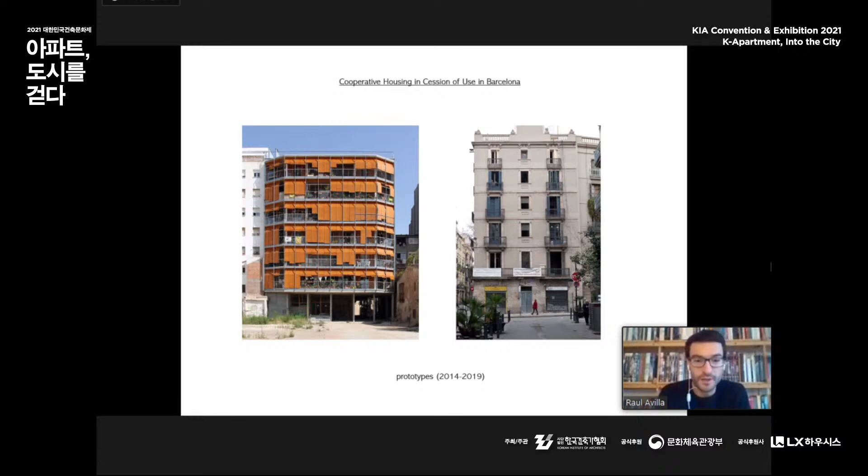So the history of cooperative housing in Barcelona has less than a decade. I'm going to go briefly through different case studies. The first two were prototypes that started in 2014, inhabited since less than two years ago. On the left-hand side, La Borda, a cooperative building on top of a public plot. On the right side, Carrer Princesa, a public building refurbished. It needs to be noted the importance of municipal support in fostering these co-housing and cooperative housing models, which, in my opinion, makes Barcelona a pioneer city in this context in Spain.

So Can Batlló, long story short, is part of an industrial settlement which had been claimed by grassroots as part of public facilities for many decades. Finally, in 2011, neighbors entered the premises and started self-organizing them with the permission of the administration, creating a number of working groups to address the public facilities, producing them in a self-managed way, claiming that since they were the ones producing and procuring them, they would be able to do better than the administration. One of them was the housing working group, which produced the example of La Borda that I was just mentioning.

In this case, dwellers decided to have less private space in their houses in order to foster shared spaces or collective spaces, given limited resources in both budget and space. This produced a number of spaces which are actually extensions of the house, making the dwellings bigger than they actually are.

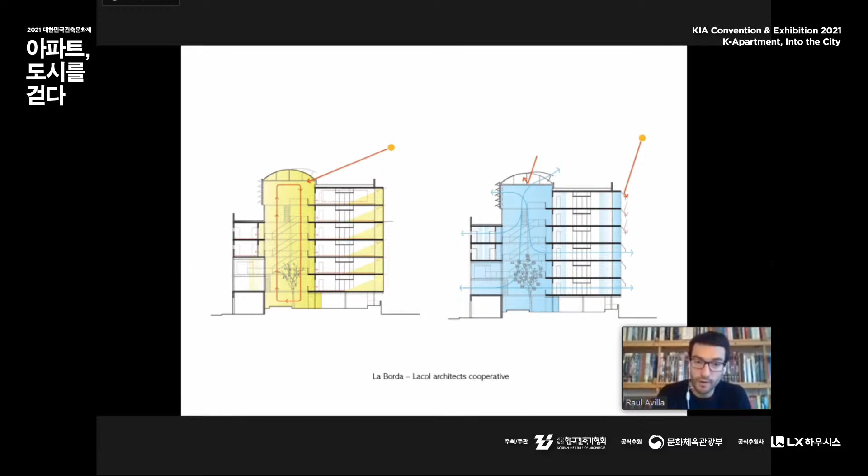This is allowed since both ownership and management is collective, and this significantly improves the energetic performance of the building for the benefit of dwellers. On the other hand, it produces a pedagogical effect in the way users understand the carbon footprint of their own living.

On the other hand, the typology in this case is defined by three different sizes. As opposed to what we were looking at before, where the household composition was predetermined, in this case that does not happen. There's freedom for users and households to interpret these dwellings, and dwellings are defined in relation to the household size and not the composition.

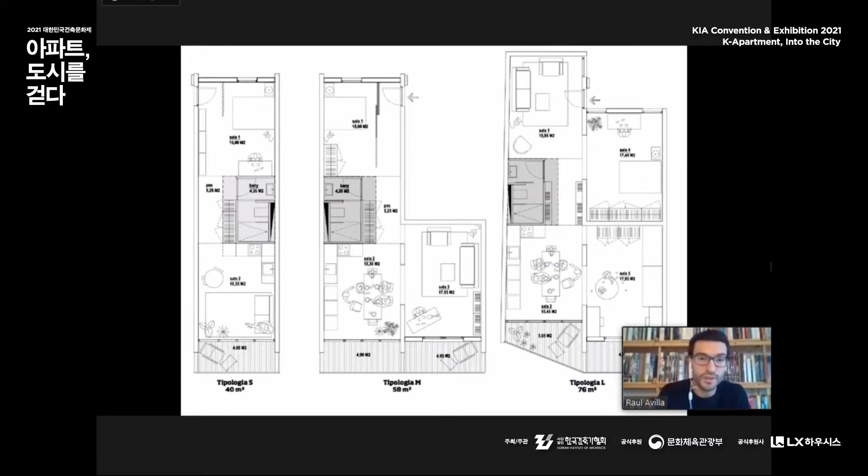In addition, there are some extra rooms that can shift from one dwelling to the other. So these houses are actually able to increase or decrease over time, allowing a higher degree of adaptability in the future. That's how the first floor plan looks like.

Dwellings are facing south, where the sun comes from, and then north is the place of public utilities and shared spaces. And if you can see this photograph, which is pretty much like a section of the building, we can see how these shared spaces are actually scattered throughout the building, allowing a higher degree of access for all dwellings.

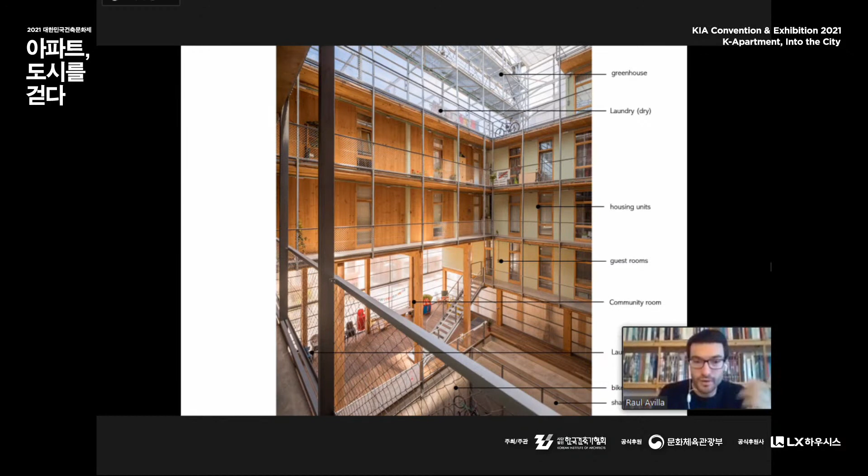So these are a couple of images of the building I took a few weeks ago, showing how the building looks like nowadays. You can see the appropriation of the shared spaces by dwellers, and this responds to a high confidence that they have among each other, and this feeling of community that allows the use of the shared space.

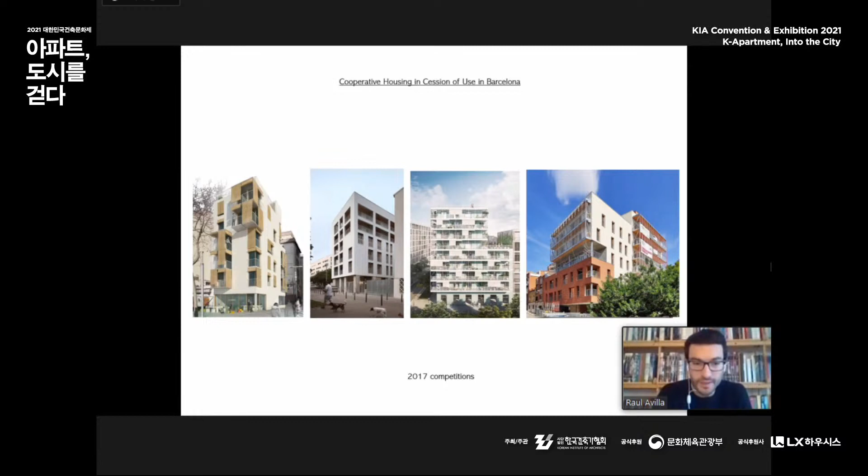So after 2014, there were two other competitions, in 2017 and 2020, by the municipality to foster the cooperative housing model. An example is La Palma, which is in the Poblenou neighborhood, and another example is Cirerers.

In this case, as you can see, both buildings, like La Borda, are built in wood, which is something new in Spain, and actually makes construction more expensive. So dwellers decided to build more expensively in order to have a lower impact in terms of carbon footprint. The building responds to dwellers' concerns, both politically and socially, in relation to the impact of building in our cities.

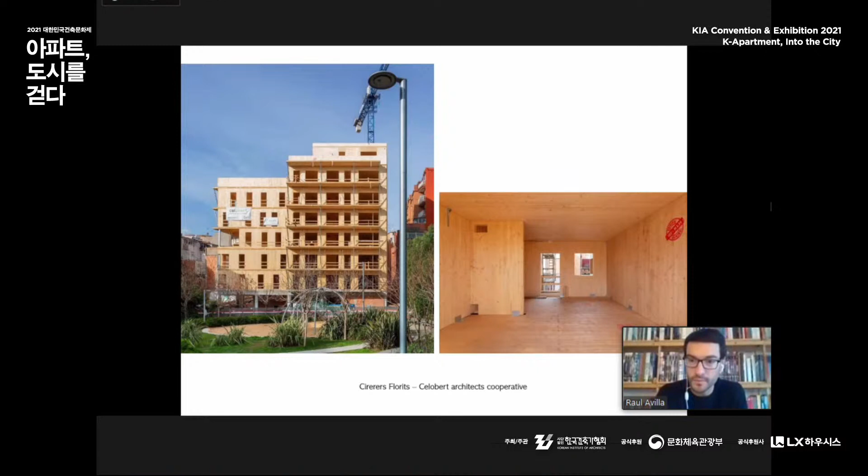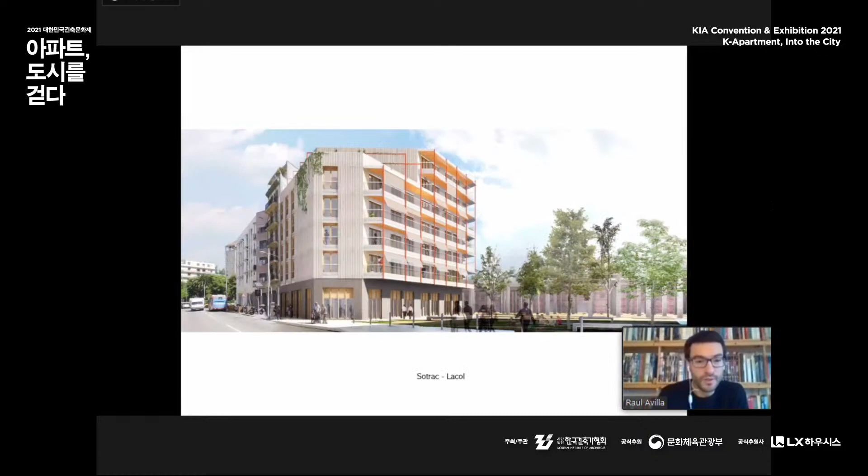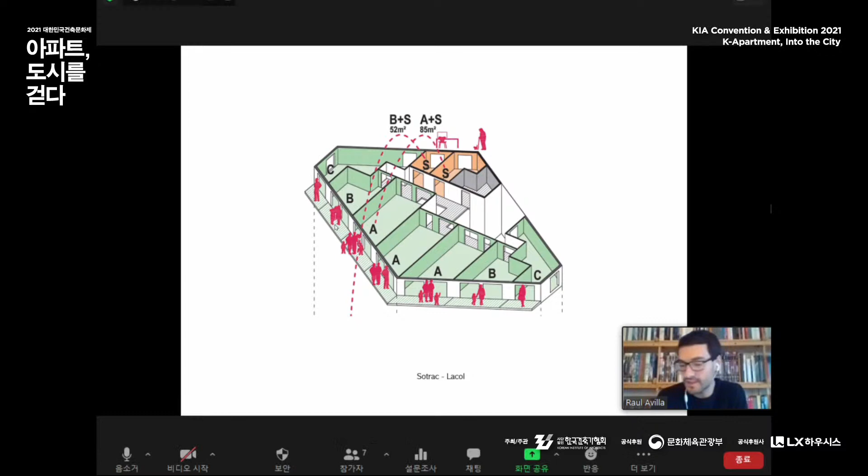Then the third competition took place in 2020, and in each of them there's a degree of experimentation. For example, the Sotrac building by Lacol, also in Can Batlló, is experimenting on one hand with satellite rooms, how two rooms can be an extension of all these apartments we can see here, or how the floor plan, so each floor, can be understood as a cluster living in which the entire floor would be kind of a house.

This is a model that has been tested successfully in some other countries, for example Switzerland, but we don't have precedents in Spain due to the legislative understanding of what is a home and who composes it.

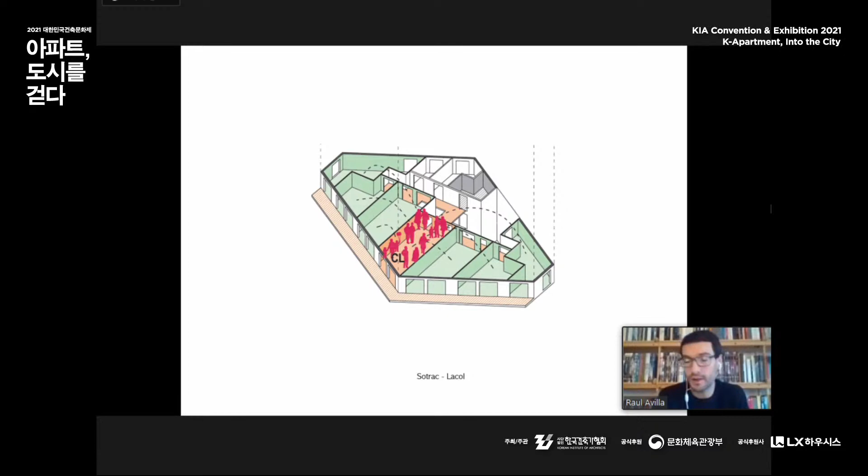So that's how the building will look like. Again, you can see the greenhouse on top, wooden construction, and fostering of...

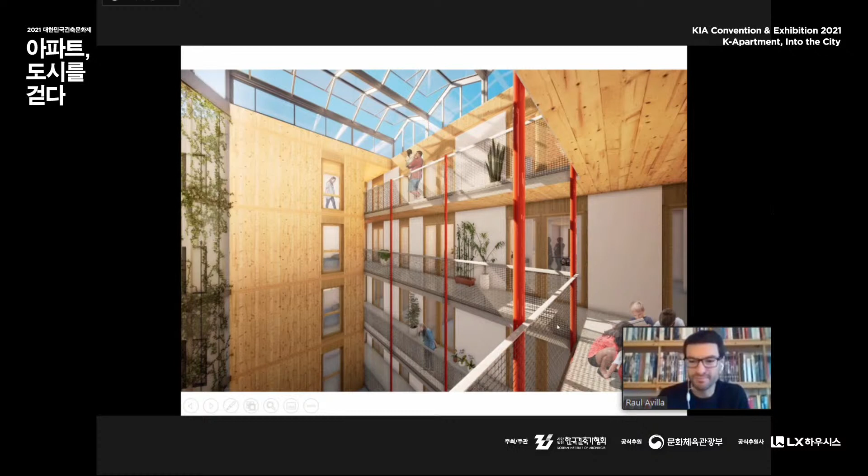The last example I will present is a building that I'm co-author of the design for, and it was awarded a first prize, as with the previous example.

In this case, as in the previous one, it's important to underscore the role of the active user and the awareness of what it means to live in co-housing with a community. We wanted to address the concern that we don't know how we will be living in the future in terms of household composition, so we designed a building that is neutral and operates as an infrastructure, taking as a starting point Habraken's theory of infill and support.

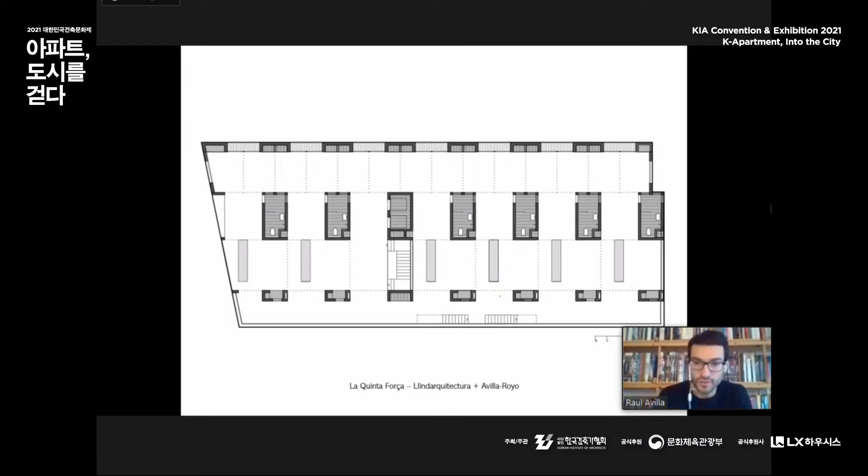So the building was delivered to the community as you can see now. They could decide the limits of the houses according to a predefined system agreed with them in the first meetings. The building aims to respond to different situations and futures: nuclear households, extended households to address problems like aging population and solitude, and to respond to multi-generational living.

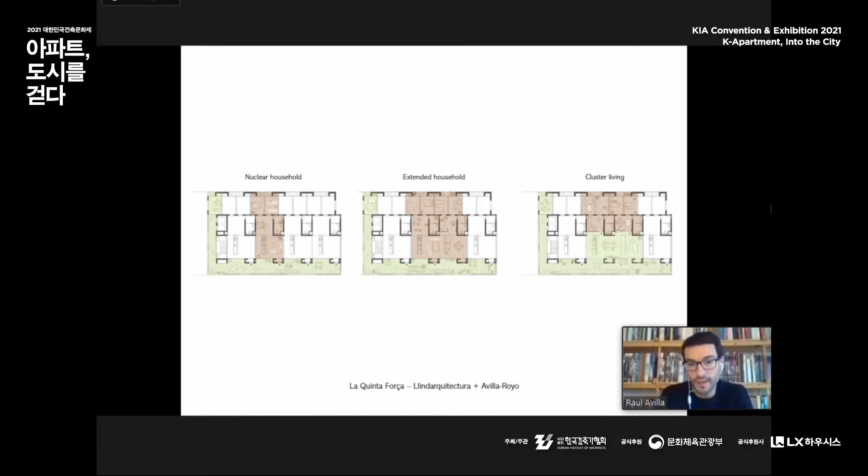And in the last example, cluster living. The idea is that the building can take all these different forms over time, not something decided only at the moment of first inhabitation. This is possible thanks to the collective property and collective self-management of the building.

That's one of the potential outcomes of the plan. We already envision rooms that can be used in many different ways, where certain shared spaces are generously appropriated by the dwelling houses.

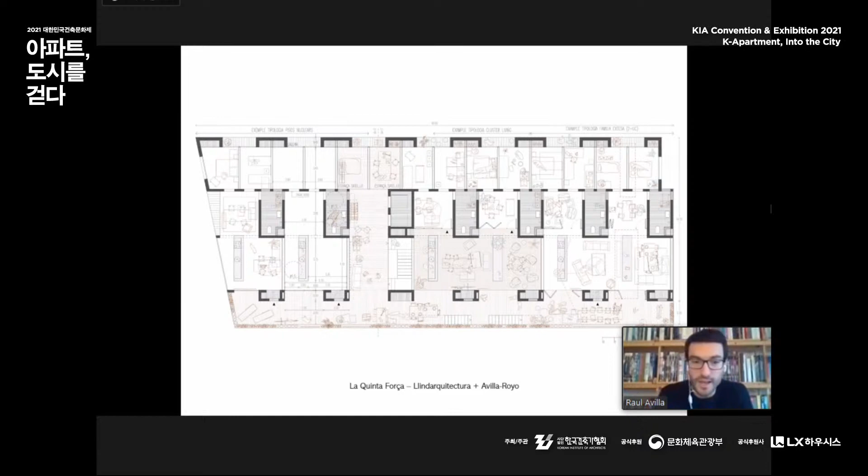As in all these co-housing buildings, there's always a certain generosity in the shared spaces. In this case, the rooftop, as the most privileged area of the building, is where the community is meant to gather and enjoy together.

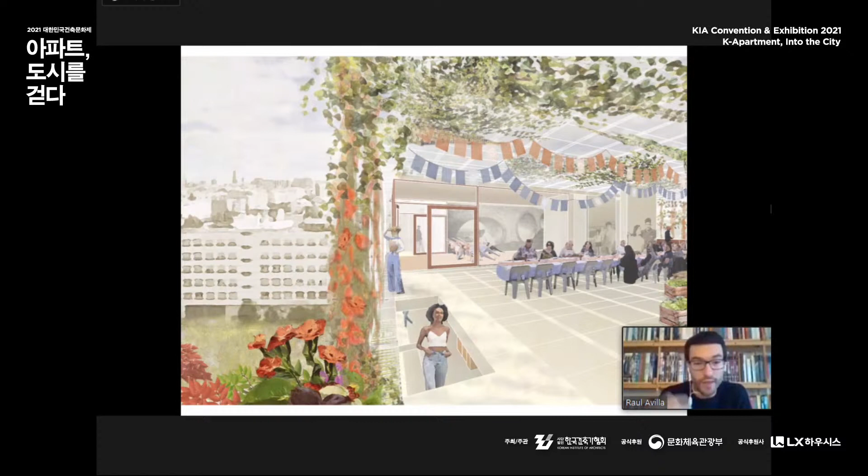To finish, I'd like to introduce the research I'm developing right now for my PhD, about the role of architects as mediators and enablers in a disciplinary shift toward community-led architecture. This includes cooperative housing and how it responds to changing social needs. It will become a toolkit of specific design methods that enable these collaborative architectures to produce specific spatial outcomes resulting from distinctive design processes.

I'd like to finish with this quote from Robert Sommer: 'Good design becomes meaningless tautology if we consider that man will be reshaped to fit whatever environment he creates. The long-range question is not so much what sort of environment we want, but what sort of man we want.' Thank you very much.

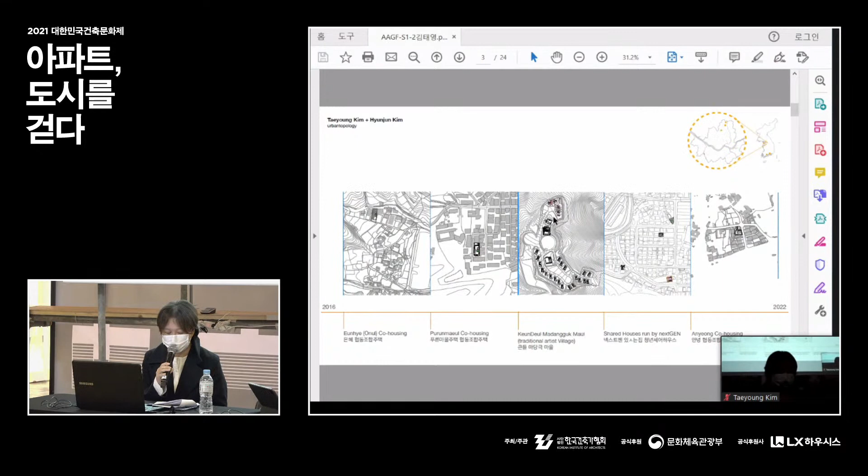The first community project is called Eunhye Co-Housing, which has been featured in the media many times due to its strong sense of community and as a model for a healthy and sustainable social family. The community had been formed for 10 years before they came up with the idea of co-living. They loved traveling and found it a way to create some sense of togetherness.

A site they found had a great view to Dobong Mountain, but its floor area ratio was lower than expected. To accommodate 50 residents, they decided to live like travelers, reducing individuals' belongings. It has a deeper meaning in that they wanted to change everyday routine into self-organized intellective, creative, physical activities in manifolds, as loose and open journeys of individuals and small groups within one community.

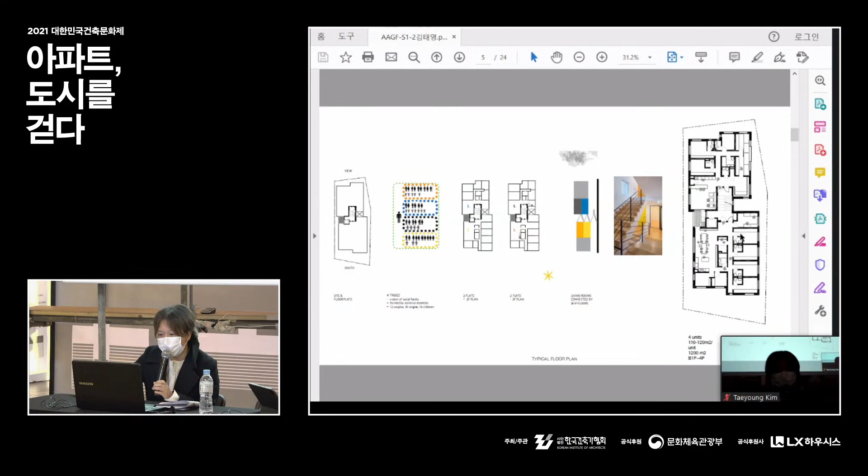You can see the skip floors and the different colors indicating the 4 tribes and their living rooms in the center surrounding this core. The living rooms reflect the unique characteristics of the tribes — as you can see, the 4 living rooms are quite different, and they are open to each other. The basic agreement for this aim is to take off shoes at the entrance of the building and to keep the doors of the flats open.

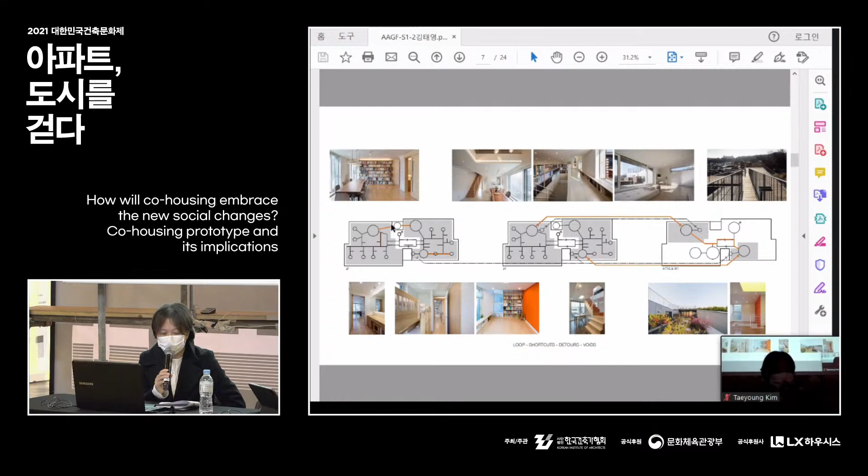This is a topological diagram connecting the 2nd floor, 3rd floor, and the attic floor, showing the 4 tribes' flats here. Circulations are carefully designed to provide loops, shortcuts, detours, and voids for visual connection and continuity. Constant negotiations of territories are expected to take place every day, making it unique in ever-changing and voluntary encounters.

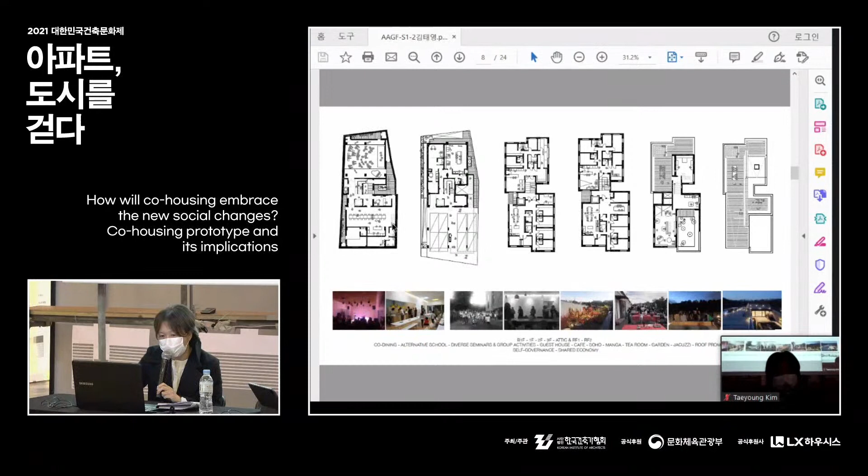The community activities include, but are not limited to, carefully discussed and designed communal spaces and living rooms over 6 floors: co-dining in the basement, assembly, alternative schools, diverse seminars and group activities, guest stays on the ground floor, cafe, Soho, manga lounge in the attic floors, tea room, garden in the roof garden, and north roof promenades. You can see the many activities that took place in the housing.

It was featured in Brick magazine. I will show the video clips later after this presentation, if we have time.

The second project is called the Pureun Maeul project. 9 doctors' families got together to live alone together — quite different from the community spirit of the first project. They share voluntary medical service, religion, and an interest in childcare, in a narrow

and deep site with a great view towards Bukhan Mountain. The challenge was to accommodate 2 floors of community programs, as you can see in the gray area in the section on the far right, and 3 floors of 9 flats, each with 3 bedrooms, LDK, and 2 toilets.

They wanted to overcome the disadvantage of the lower floors and the north- or west-facing flats by choosing their own neighbors and forming clusters. The neighbors are willing to share the memory of levels, views, orientations, and overall environmental qualities. The children will grow up together sharing such memories.

So the south flats, which have good orientation and views, would remain as they are, but in the middle they will have L-shaped duplexes, and the north-facing flat will have scissor duplexes. As you can see in the 3 plan drawings, the unit plans look quite complicated. The construction company called it like a circus of reinforced concrete structure.

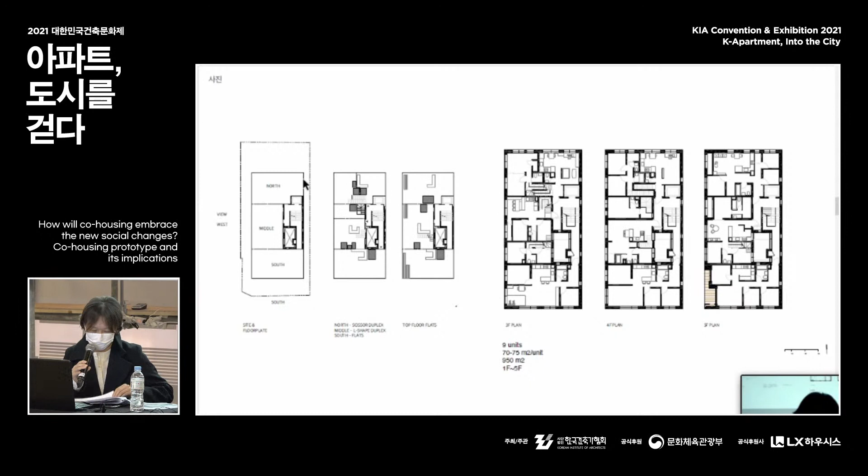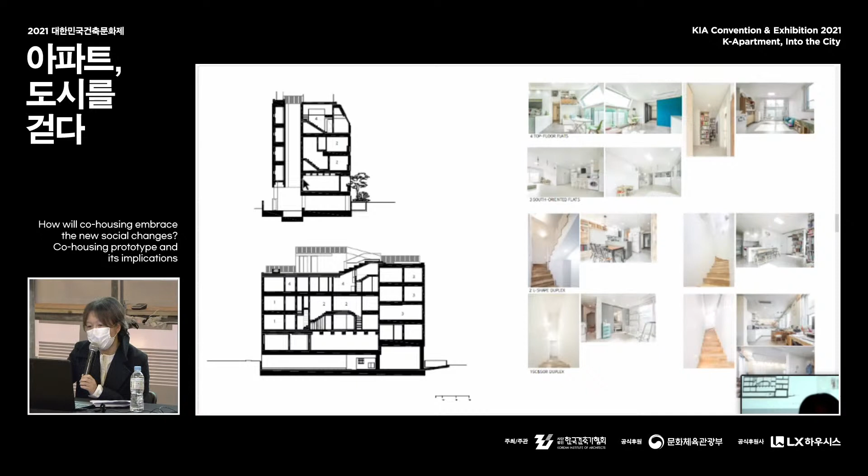The communal spaces make a vertical journey from piloty playground, office, assembly, daycare on the 2nd floor, and duplex and flats over the 3 floors. The interior spaces are all different, depending on the family's characteristics.

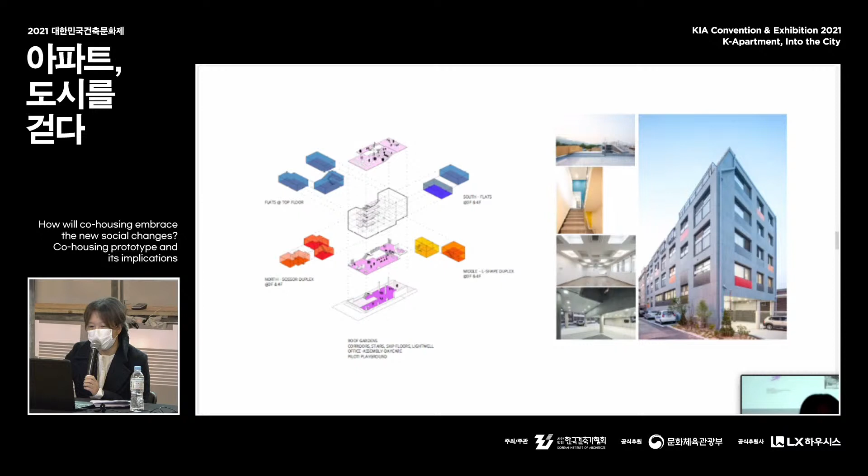As you can see, there's a scissor duplex, an L-shaped duplex in the middle, south flats, and top floor flats. From the ground, the 1st floor, and the roof garden, there are communal spaces across the 5 floors. The 3rd community is called Anyeong in Korean, meaning 'be well'.

5 families met at the same nursery, wanted to make their children old friends as they grow up. With a new family added, 6 families found a site near Dobong Primary School and decided to have cooperative housing. This community is quite different from the other 2 - they are quite new to each other.

With a view to Dobong Mountain to the north, the site has an irregular shape, facing a neighbor building to the south. The challenge was to utilize the north part of the site, populating the main access garden, the common terraces, and the roof garden. Their hope for their children's future to be well with their friends, caring for each other in this society of prevailing individualism, starts with saying hello in the morning and evening, on the way to school or on the way back home.

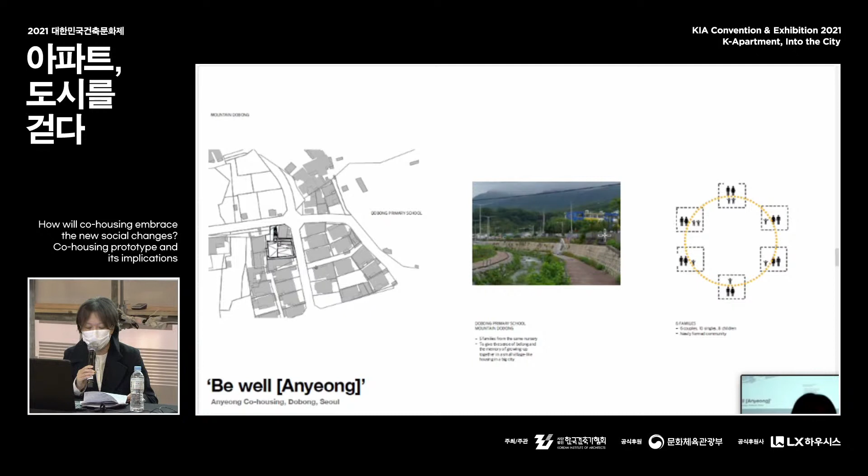Utilizing the potentials of the site fully, the core occupies the center of the built area, the floor plate, freeing up the perimeter for living. The layout of each flat follows guidelines of the 5 areas, including 2 corners.

Wet areas are populated in the north areas. The rooms in the northeast or northwest corners are open to Dobong Mountain. The design is still in progress, developing the principles and variations for 6 families of varying lifestyles and family profiles.

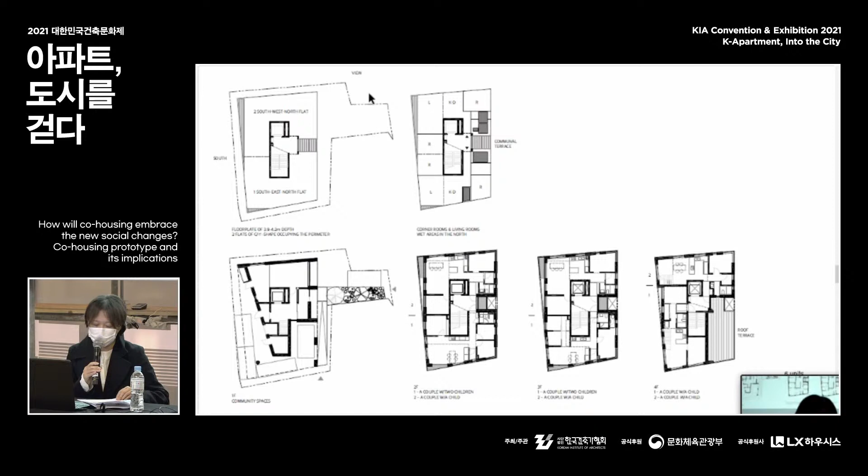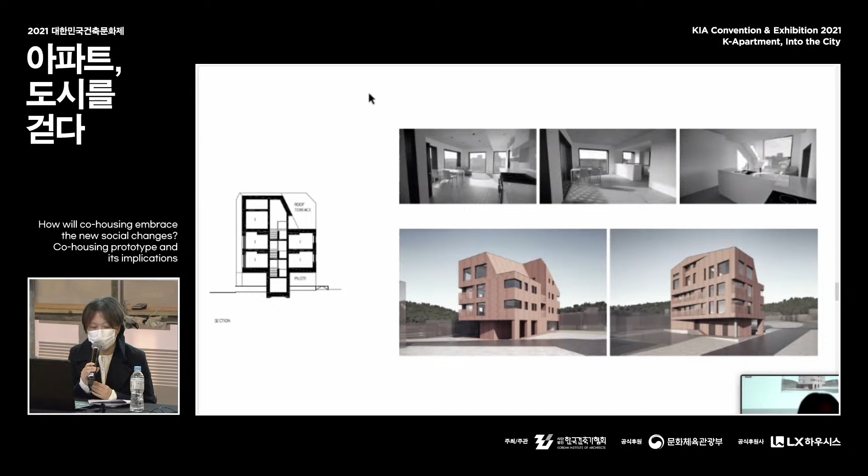The design is to keep a very different spatial experience of living in the perimeter, unusual in Korean housing prototypes, even after this community of 6 families agreed to move out in the future.

The next one is called Share House Next Gen. Suncheon Municipality selected Next Gen, the activist group for ecology living, as the operator of the 4 shared houses owned and remodeled by Suncheon Municipality. The 4 houses are bought among the empty houses in the neighborhood without clear relationships.

We started the design process by communicating with Next Gen, reprogramming the 4 houses with new connectivity and continuity. Some features from the development of 30 years were maintained and refreshed, while their spatial characters are revitalized with new interventions - new structures, roof, added floors, gardens, roof gardens, and public stairs and promenades.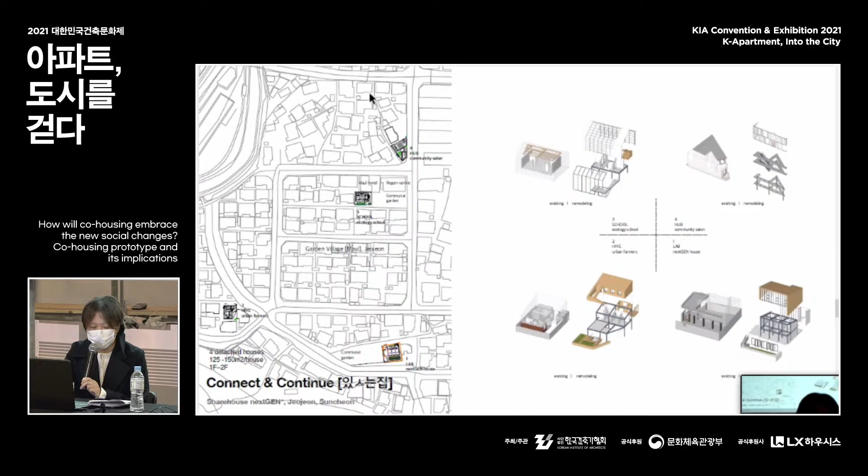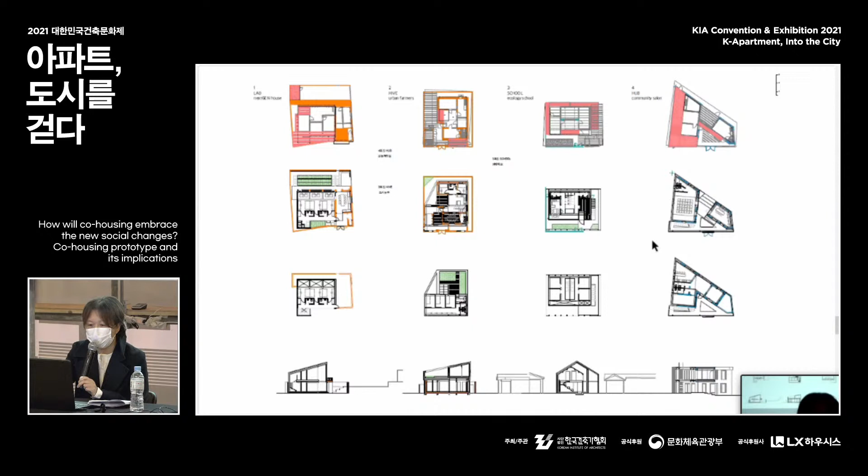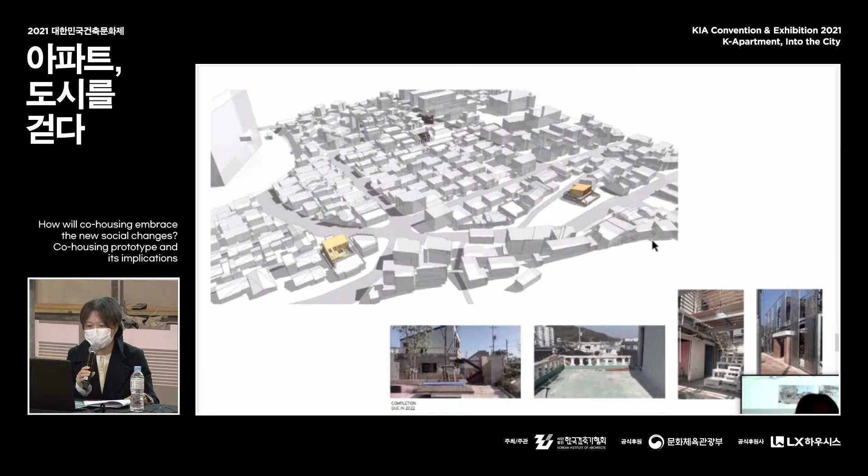As you can see at the top, there's the existing house type with brick structure, and the colors show old features that remain, while the others are all added as remodeling. The 4 programs - home, urban farming, community salon, ecological school - will be connected, and they are under construction now.

The last project is about migrating artists. Kundul Artist Group is made of traditional performance artists called Madanggeuk in Korean, and their supporting organization. They share art education, farming, and gardening, pursuing integrity as an ecological community.

Relocating them from Jinju to Sancheong, they dreamed about a village where they perform and live together. As they work daytime, from working on scripts, costume making, stage production, practices, performances, they wish to have their own time during night in private settings. So, 20 detached houses.

These are the types that we developed for 20 detached houses, 10 container houses, and 3 community facilities, including a performance hall. The houses had to be low budget.

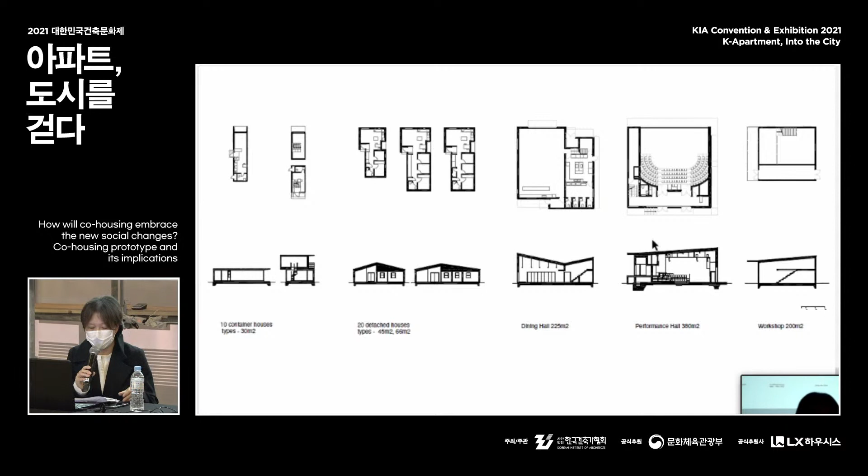Without compromising the qualities, the scale contrast was another challenge. Further, a balance was required between differentiating artists' houses and their performance spaces, while at the same time integrating them into a collective landscape. The master plan was done prior to the architectural design stage.

The subtle shifting of the houses created privacy for each, as well as changing views towards Cheonwang Peak, Jiri Mountain. Typology of the roofs was studied to achieve efficiency for structure, cross ventilation, and cost saving, while fitting well into the surrounding landscape.

Each house is unique with its changing topography and relationship with the neighboring houses. The funny thing is, the artists will migrate to the next door every 5 years.

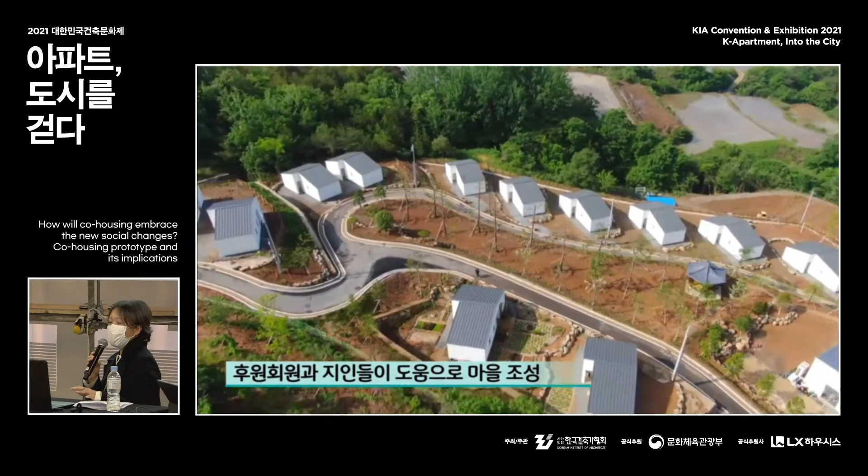The challenge was that the artists use this space for performance, but also have their private houses as well, so how to show their houses during the performance was tricky. But the good thing is they use sunset and nighttime for their performance, so the houses disappear during the concert.

Very simple system for the house. And the living room and the porch near the dining space provide some views towards Cheonwang Peak.

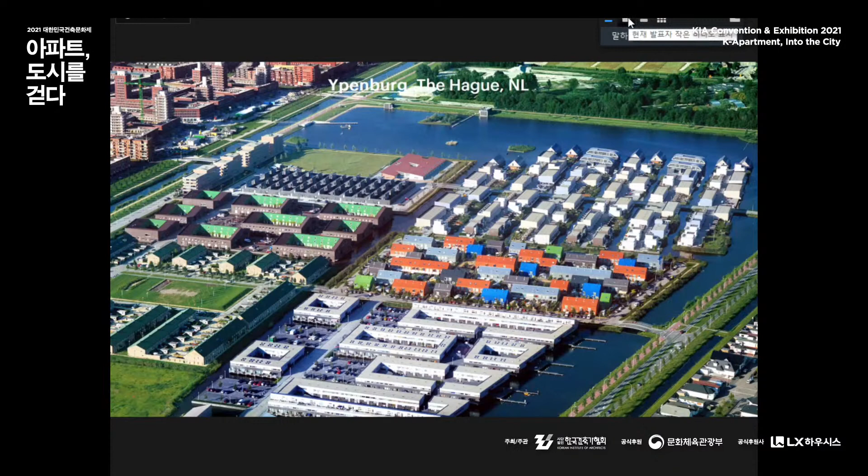Diversity and collectivity is a quite interesting issue for us to work on, especially in the Dutch context. This is one of the early suburban housing projects that we made in Den Haag. Here we were asking ourselves, what is the reason why people escape from the city center to the suburban context? We found out they all have different intentions, different needs, and we tried to invent a very diverse typology.

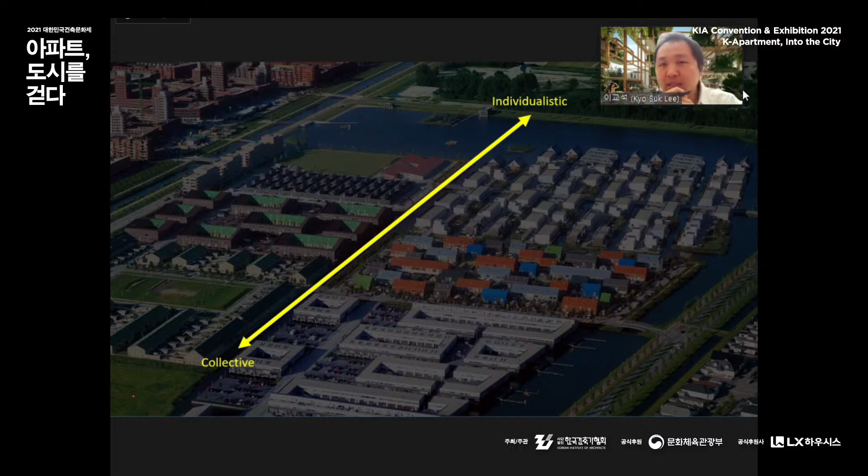So one way is that what if we make one side more collective, the other side more individualistic? And the other way, one side is more introverted, the other side extroverted. This is the type we imagine with the required density. One of the collective extroverted types has an almost shared car-free endless garden. Then collective introverted, 8 or 10 houses share their own courtyard. And the extroverted individual types are very much exposed to the nature.

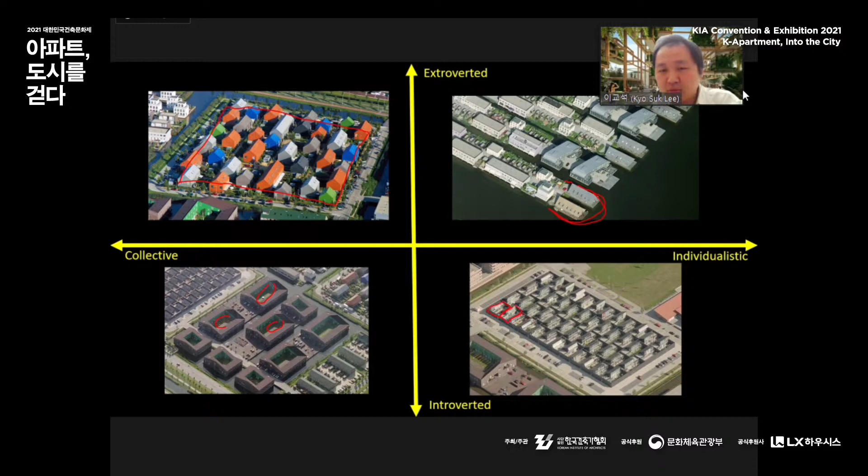Or one of the extreme cases, introverted individualistic, every house has their own castle, almost like an enclosed garden without revealing any of their property. So this is the variation, you see.

In one extreme case, that is the best place for the family who has young children, and they don't have any border between the houses. They share the entire ground level almost as a playground. And the extreme case on the other side is completely protected, but they enjoy their own individuality within their garden.

This idea was also developed in a three-dimensional way. That's a project in Silodam, built on the water. In this project, we tried to bring many different needs of contemporary housing, also invested in by many different housing cooperatives. We brought almost 20-25 different housing types according to the new needs of housing at the time in Amsterdam. So this is, let's say, variation.

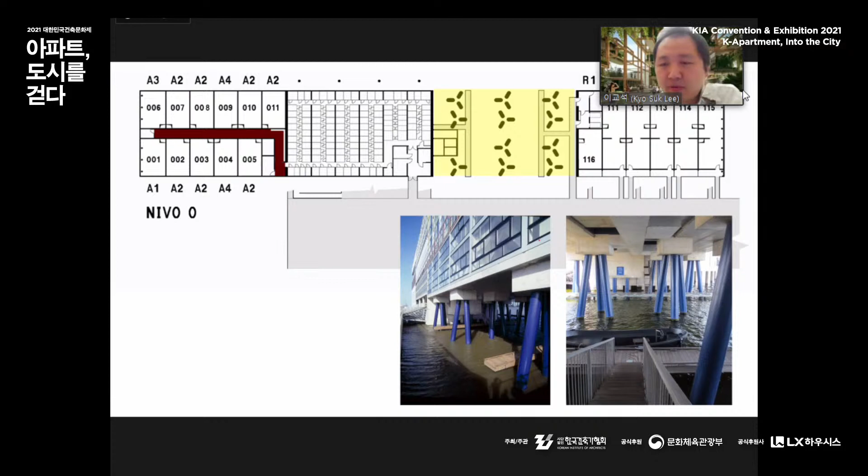Some of the housing has a duplex, panoramic view to the water, or a patio, or is accessible by stairs from the ground level. We tried to bring some collective space like a harbor, so people could commute from this housing to the city of Amsterdam. Also, though it's a very narrow site, we tried to bring a deck on top of one of the office tenants, so it could be used as a collective plaza. So every weekend there's a yoga activity or other sports activity.

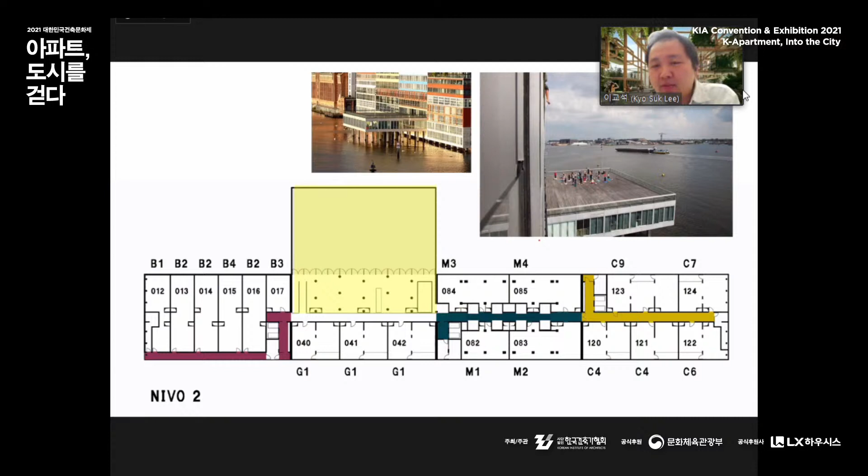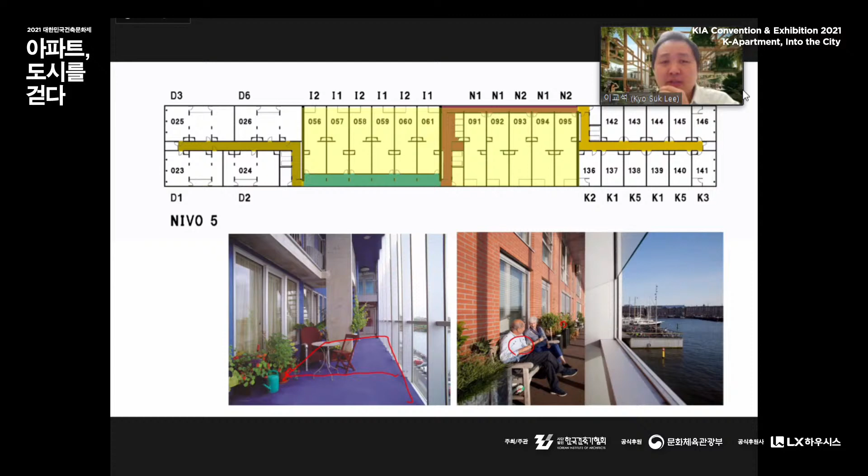After handing over the building to the residents, we found an interesting phenomenon: this space is not what we designed, that's how they reinvented it. Since we have many duplex housing units in the building, some floors don't need an elevator lobby, and that space was abandoned. These people then used it as a collective library or collective gym themselves. So this project is quite about diversity and individual needs, and eventually that creates a will to share and operate the space together.

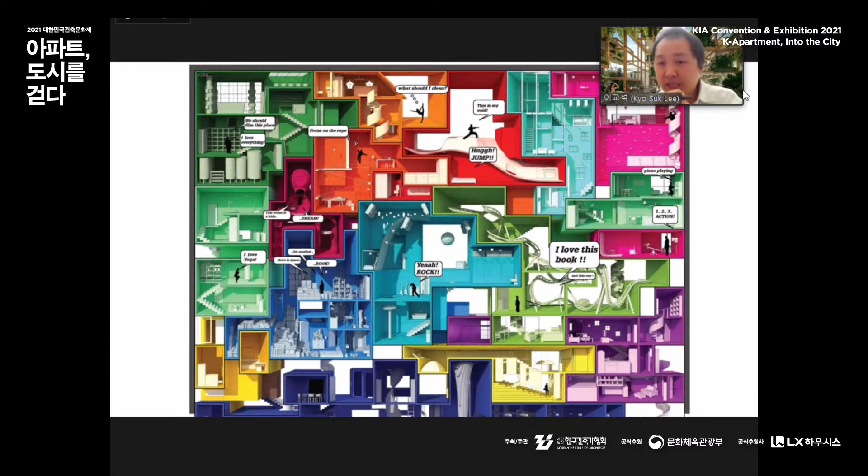This intention is also being researched at TU Delft, where we operate a studio. The Why Factory works with students on how individual needs could be negotiated and also physicalized in collective housing, in an academic sense.

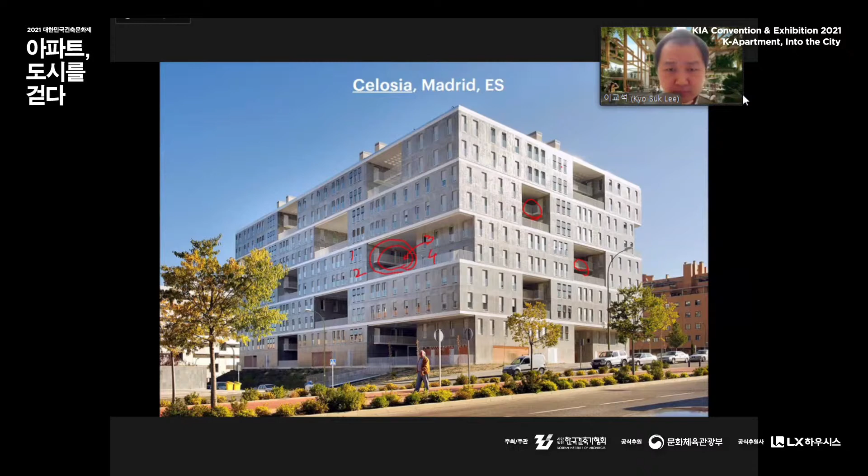Another one, also in Madrid, in the Celosia. In this case, we try to make an intimate void space where 1, 2, 3, 4 units could meet each other. We didn't define the function - they could invent their own program in that shared garden. This is how it looks around the courtyard, bringing ventilation and daylight also to the courtyard.

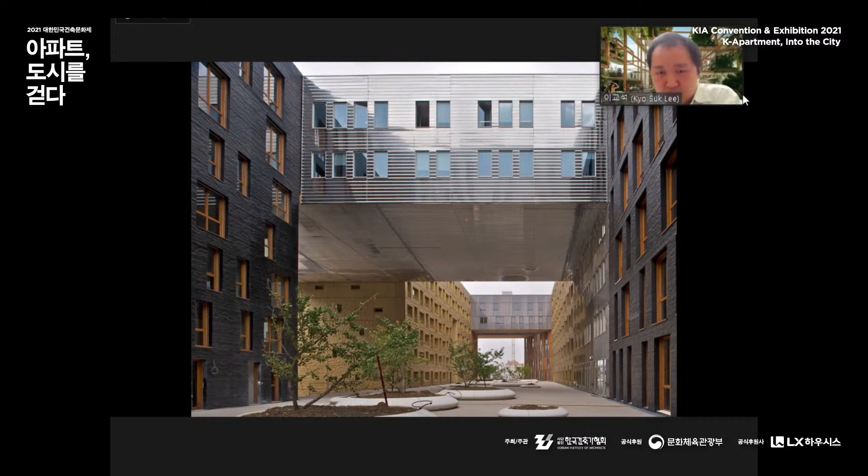This subject of porosity is also deeply researched at TU Delft, under the name of porosity. We had an academic setting to experiment how a residential tower could have a void space, many different ways to bring many different possibilities, also challenging the typical tower typology, how it could have more air.

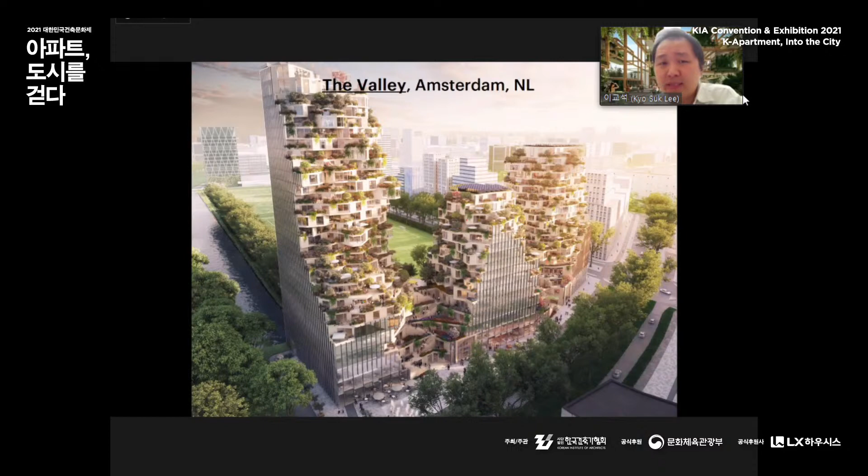A third subject is how green space could be used for collectivity. This is one of the projects we're finalizing in Amsterdam, Zuidas. We call it the valley, because we were inspired by a natural valley. So we thought: what if people living in the valley, inside the valley, share the forest, share the mountain?

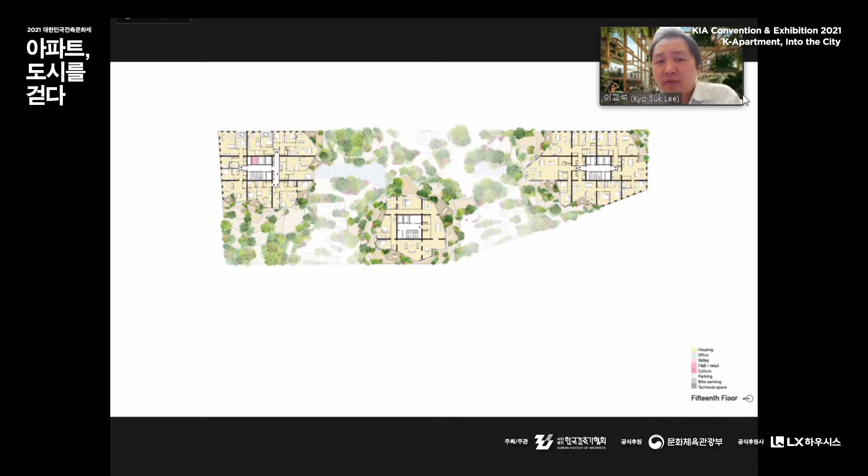The typical floor plan is quite simple - it's a typical residential tower, but every unit has its own balcony toward the garden. So it's a collective forest, as I emphasize. This is the view from one of your balconies to your neighbor.

And then we try to do something more. Compared with the previous project, it's quite a luxurious housing - that's what's happening in the Dutch housing market now. We try to bring a certain collectivity also with the neighboring side. It was a very hard process with the client, but the logic was to try to open up the podium more, more welcoming to the surroundings.

So one way we did this is to let people climb over here, but this will ensure the commercial success for their tenants. And by this way, this valley becomes almost like a public destination, where we share this collective feeling with the city.

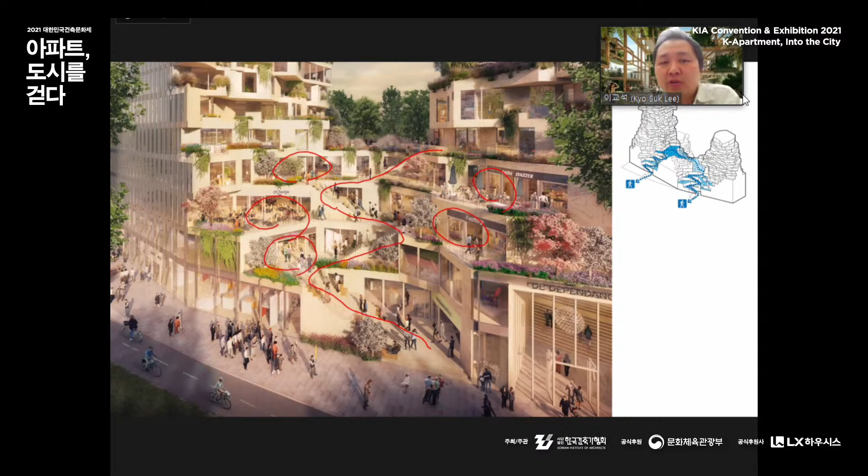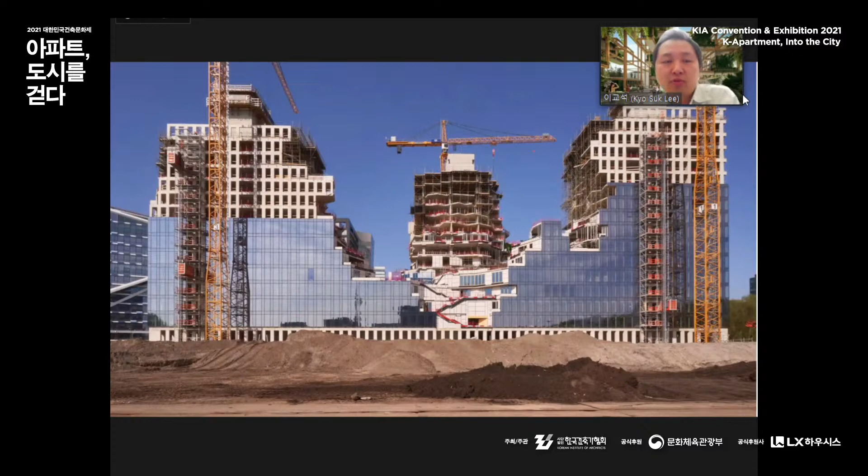This building is almost finalized, more than this image shows. It will soon be published. Here's another project in France that is a bit more experimental.

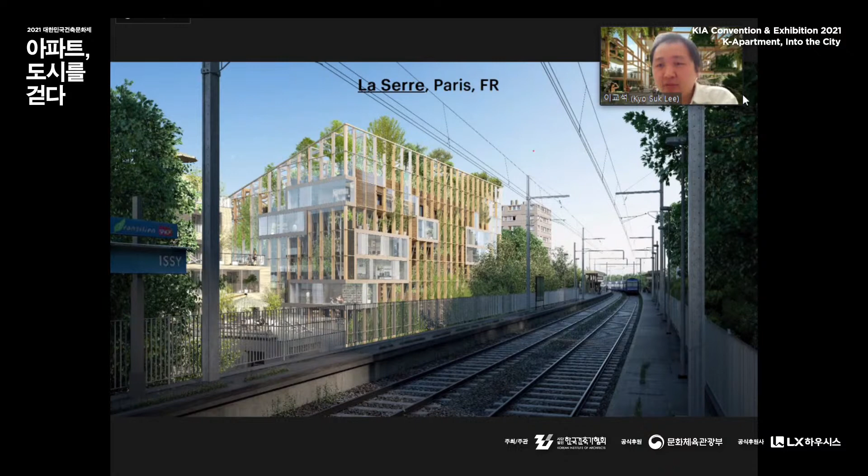What if this housing itself becomes a greenhouse with shared space? The greenhouse was needed because it's next to a train station, to block the noise and protect from it. You can see the stack of different housing units making almost one continuous climatized communal space, next to each other, embracing a new way of sharing. The greenery is maintained by the residents themselves, becoming the ultimate binding factor of the community.

The last category we're working on is mixed use - how housing could meet other functions to bring new collectivity, not only within the housing but to the city. In the Netherlands there's a huge discussion about bringing the population who escaped to suburban areas, like our first project, back to the city, showing an intensified lifestyle in the most creative way. This was also a pilot project in Rotterdam exploring how a public facility like a market could be shared together with housing.

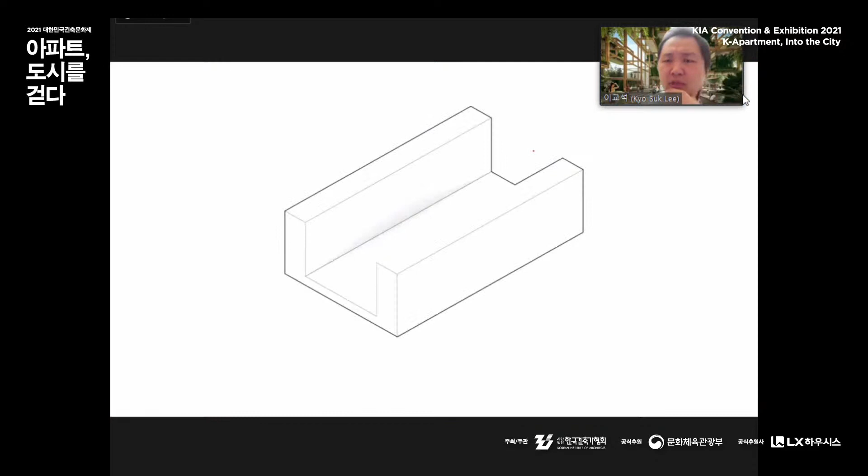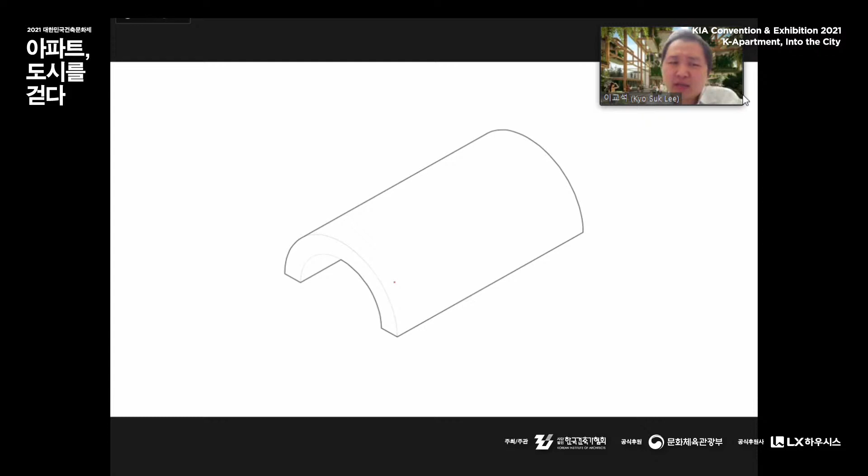This property is shared by almost 130 shops in the first two levels and 200 housing units on top, and they are connected. The penthouse sits on the bridge of the building.

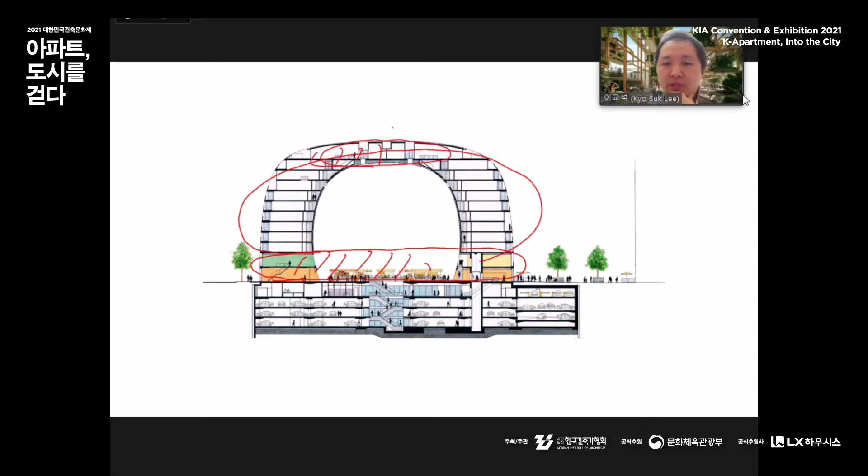So this is how it looks from the side. It looks like a typical apartment block, but inside you see the market, people coming in, and all these windows are windows from your living room. So this is a view from your living room, and this is a view from your bedroom.

So it makes the collective space together. It even celebrates the new, emerging food culture in Rotterdam that was not common before. There are many different shops with intimacy, but you can feel the collective feeling that this building brings to Rotterdam - this is how it looks when it's busy. Here's an overview.

That was the message from us, MVRDV, on how we interpreted the middle class, upper middle class, typical housing that is in demand in the housing market in Europe, and how we bring new collectivity to the project in different ways. Thank you.

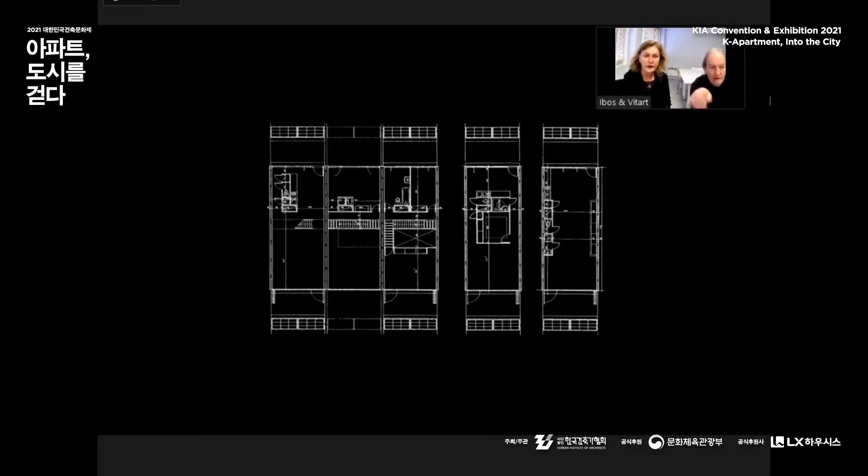The idea was to make a very rationalistic building in terms of construction. You see the plan: walls every 5 meters, 12 meters deep. On one side a corridor to enter the apartments, and on the other side a huge balcony or terrace.

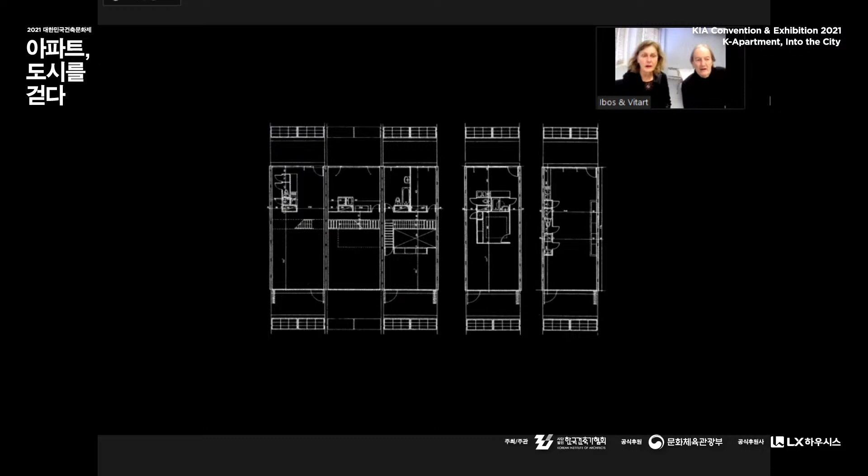You can take your dinner or lunch there when it's nice weather. The other idea was to keep the building very rough, meaning to use industrialized products, as you see on the elevation: corrugated aluminum panels for the facade.

We also used different materials, like the doors you see making the facade, which are from fire stations. You use this kind of door generally in a fire station, and we took this product for making the elevation of the building. You see the interior: concrete walls, concrete slabs, all very rough.

There is no paint except for some intervention by different artists who made paintings in the apartments. Just a night view - that's also something we wanted to show on this project at the time: to give a night view of the apartments.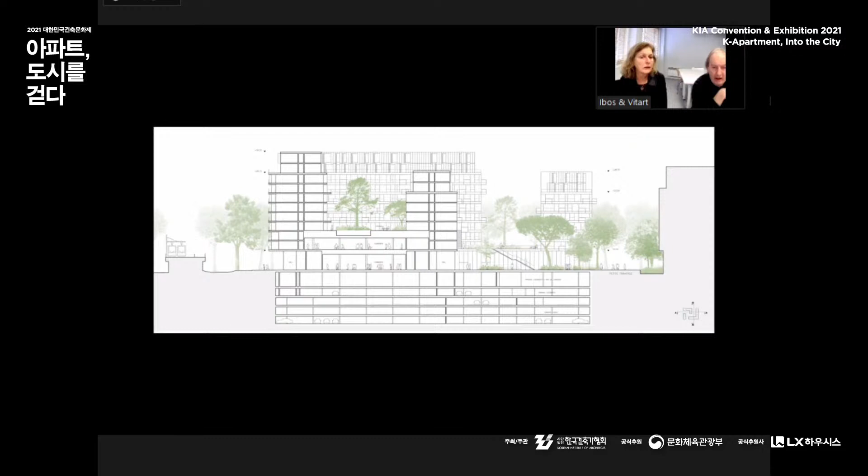This minimizes the expenses of structure, and to give something more, we try to extend the apartments on the outside, in two levels I could say: the first one private, and a common sort of huge deck.

The deck covers the commercial area on the first two floors of the building, and is a shared space overlooking, on one side, the river, the Seine, and on the other side the park, which structures the new neighborhood of this part of the suburb.

You see also how the public space enters the building with a large, huge canopy at the ground floor, and in a private way we extend the apartments with this kind of device, which is a large terrace that you can modulate in winter or in summer. You can open or close it with a glass wall, and it makes an extra surface for the apartments.